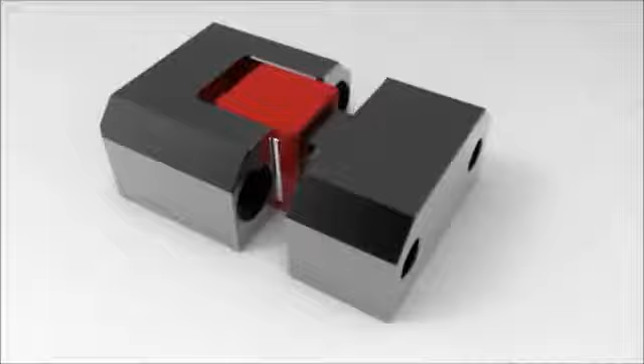Utilizing proven techniques and manufacturing methods, Extreme Components has designed and created the most effective injection molding alignment locks in the world that provide durability, reliability, and precision in a simple, inexpensive, cost-saving device.

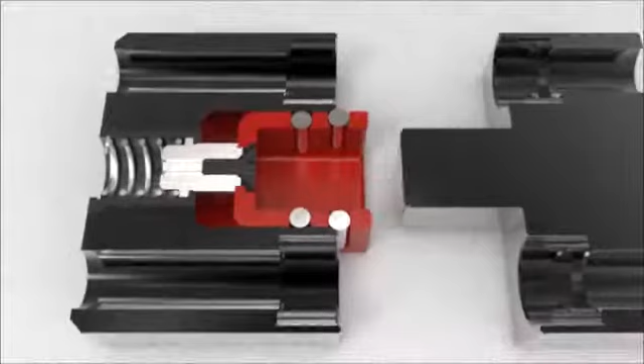The Dynamic Alignment Technology, or DAT, developed by Extreme Components, is a revolutionary method for self-aligning locks that exhibit minimal friction and wear, even at high speeds. The technology uses rollers instead of metal-to-metal frictional surfaces to align the tongue. The rollers are constrained in a cage so that they move in a prescribed manner due to the kinematic relationships

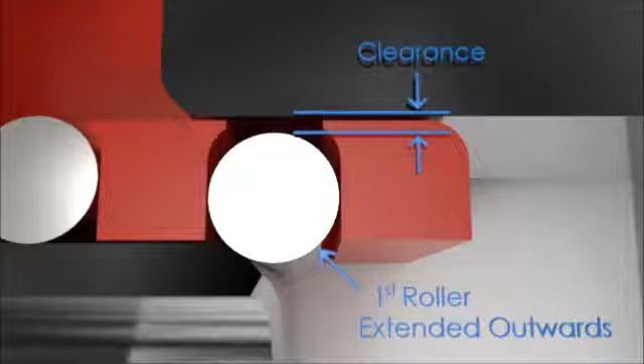between the rollers. As the tongue is inserted into the housing, the first set of rollers is extended outwards so that the tongue clears the first set of rollers. Since all the rollers are geometrically constrained by the surrounding cage, the movement of the second set of rollers causes all the rollers to move simultaneously, including the first set.

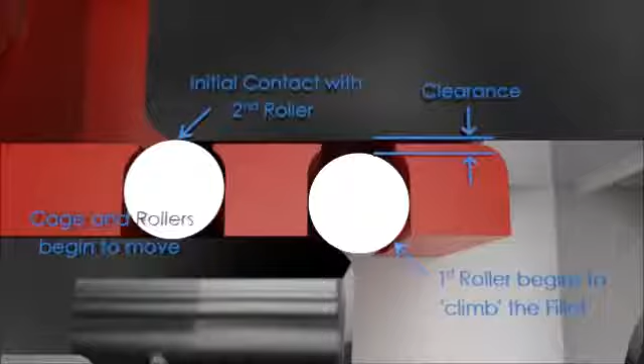The first set is initially positioned on a fillet near the outside edge. Since they are geometrically constrained to move with the second set, the first roller effectively climbs the fillet and dynamically clamps the tongue, forcing dynamic alignment between the tongue and the housing. A significant spacing between the first set and second set of rollers provides a large moment arm so that the rollers can apply a torque on the tongue that forces alignment without exhibiting an excessively large force on the rollers, which would otherwise cause mechanical wear.

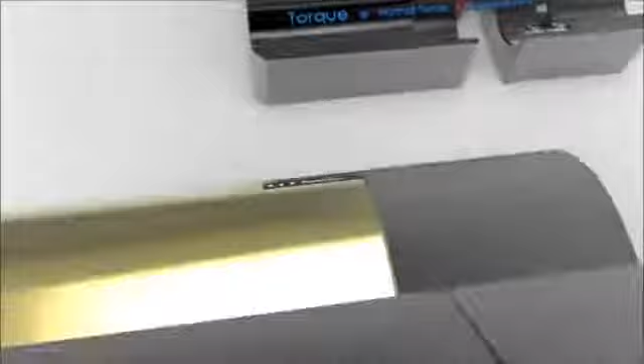In addition, the rollers provide a kinematic mechanism in which the tongue can be moved relative to the housing without direct mechanical contact between the tongue and the housing. This minimizes friction and therefore substantially decreases wear.

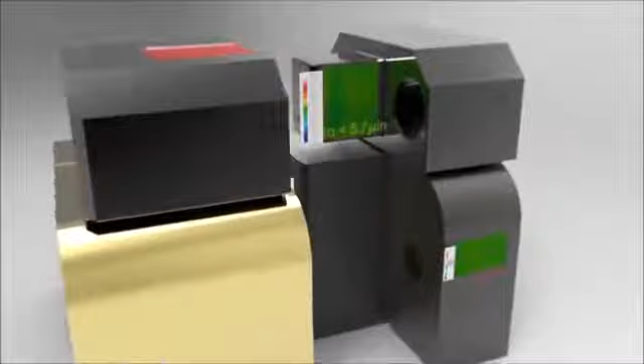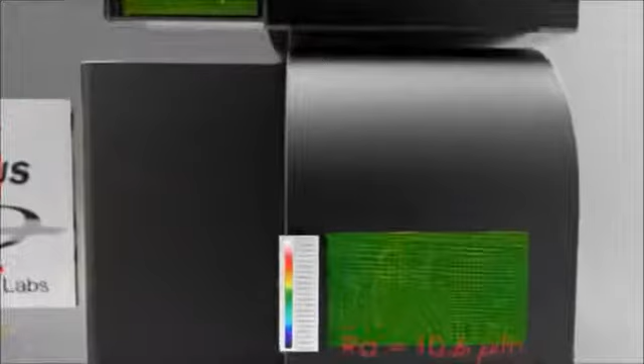Surface roughness analysis performed by Q+ Labs confirms the minimal wear experienced by Extreme Components DAT locks. Using a Cyber Technologies CT300 white light profilometer, the unused surface of a friction lock was found to have an average roughness of 10.6 microinches. The surface plot shown indicates green being a level surface, while red and blue areas represent hills and valleys, respectively.

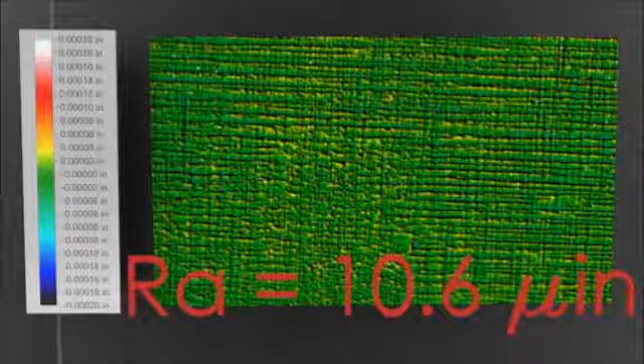As we can see, there is major deviation from the level surface, while the actual tongue contact surface was too rough to measure and galling is observed from visual inspection. In comparison, the tongue contact surface of an Extreme Components DAT lock that had been used by a multinational medical device manufacturer for 4 years of near continuous service, cycling every 7 seconds with a 2,300-pound load yielding more than 10 million cycles, was measured to have an average roughness of only 5.7 microinches.

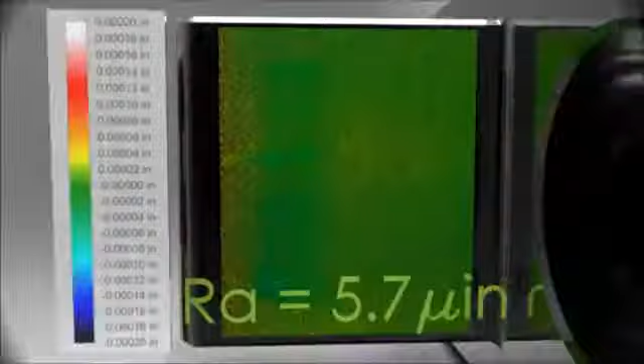The surface map shown displays better uniformity than the antiquated friction fit lock, while visual inspection of the measured lock shows a mirror-like surface and no galling. This confirms that DAT locks maintain the highest degree of precision for the most sensitive of applications even after tremendous use. Even when new, outdated friction fit locks can't compete with the DAT lock's level of performance.

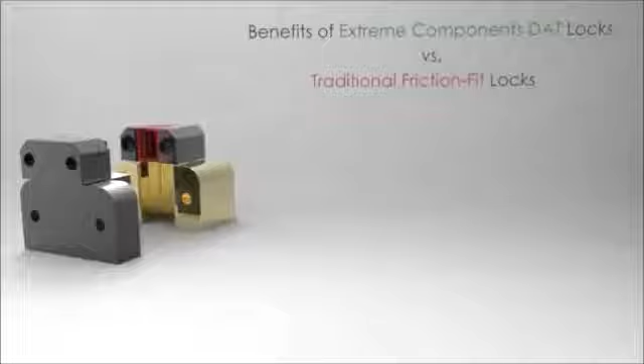The kinematics of the DAT locks results in a number of benefits over friction fit locks, including a reduction of friction, vibrations, heat, and wear, lower maintenance costs and longer lifetime, better reliability and precision, and a smaller profile for the same mechanical load. This translates to lower manufacturing costs by reducing machine downtime, increasing manufacturing speed, decreasing the amount of flash created, and maintaining part tolerances down to 0.2 after more than 10 million cycles.

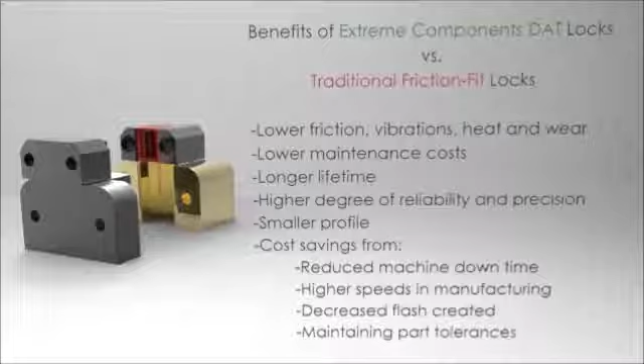Now that we have demonstrated how Extreme Components locks utilizing DAT work and evaluated some of the cost-performance benefits, let's briefly examine why this device became necessary. As we all know, there have been enormous advances in injection mold manufacturing. CAD/CAM makes it possible to achieve very complex geometries while holding a tolerance of 0.2. Lead times have been compressed, and there's been an increase in competitiveness from low-cost countries. All the while, the tool builder is expected to guarantee mold performance of 1 to 5 million shots, something unheard of 20 years ago.

Recognizing that leader pins and existing alignment devices were inadequate even when new out of the box, we laid a plan to develop a better product. The first step in a process like this is to identify the culprit. In this case, friction, which leads to other factors such as thermal expansion, vibration, and wear of mechanical parts on the press and mold itself.

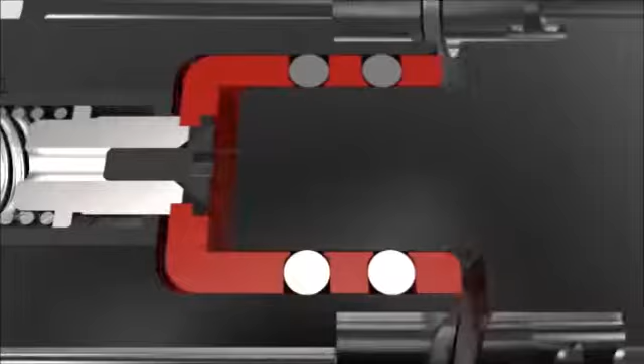What was needed was a device that could not fall out of adjustment, required no batteries, limit switches, or any human intervention besides general maintenance requirements that would be the same as the mold itself, since unscheduled maintenance due to premature wear can be very costly for manufacturers. It must also accommodate pockets machined into existing molds and conform to standard mold designs.

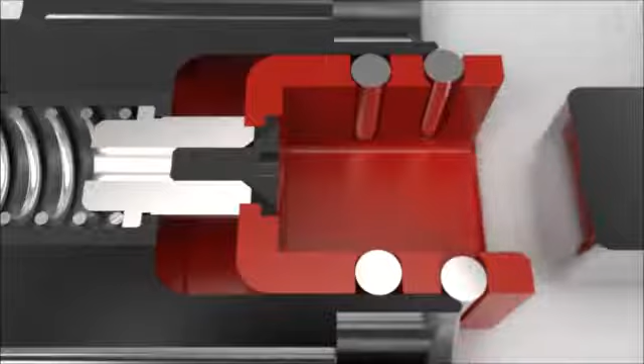From our research, we know that even in a new press, the platen will not repeat to an exact position every cycle because of the accumulation of errors on the many components of the press and required tolerances of things like tie bars, bushings, hardened ways, and toggles, to name a few. Most importantly, this device had to make all required corrections of the dynamic side of the tool and the platen every cycle and could not wear over time. To do this, it had to apply exact equal and opposite forces to get the same final result, regardless of press conditions or human error, and all but eliminate friction.

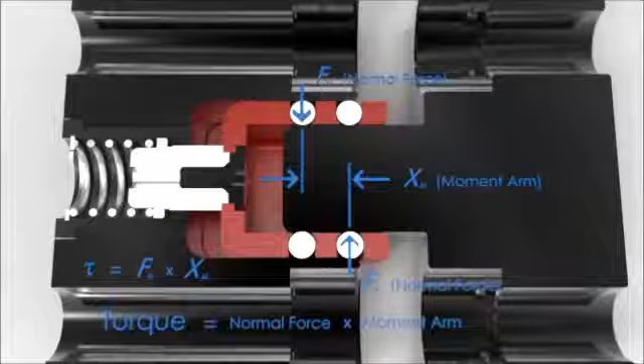We found the answer in our own CNC machines, more specifically the needle bearings and hardened ways that are used for guidance and precision. These machines can take enormous loads with constantly changing conditions of speed, direction, and temperature, as well as changing machining requirements such as roughing or finishing, and always produce the same results even over extended periods of time. In observing these proven techniques and taking into consideration the required change of conditions of injection molding, we developed a lock with dynamic alignment technology, the highest precision and longest lasting device of its kind in the world.

Our stock consists of a full range of sizes and styles to accommodate nearly 95% of tools, and customs are available upon request. Currently under development is a first-of-its-kind calculator to make selection of a particular device easier and more precise.